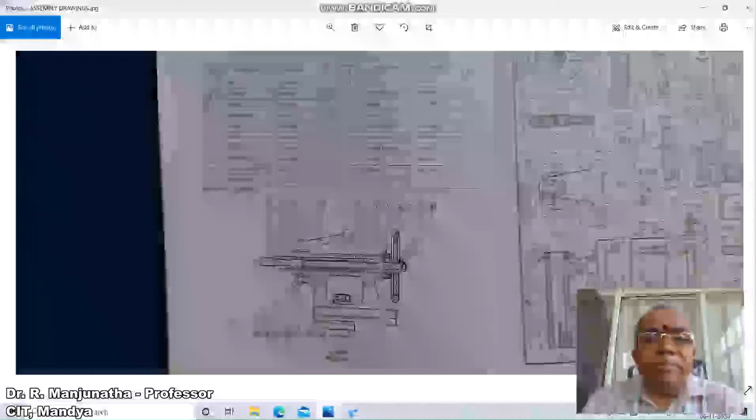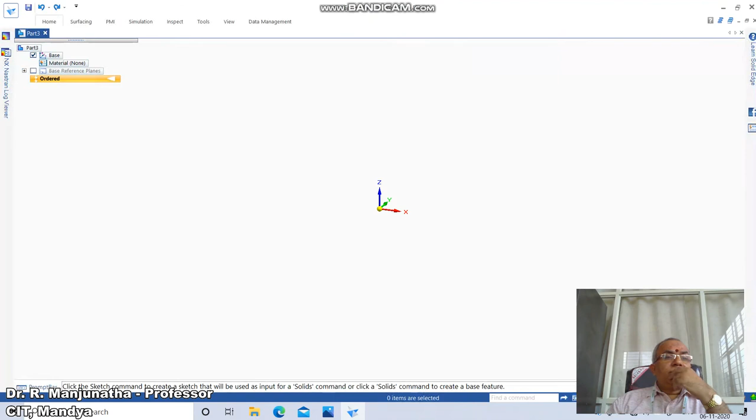So this is the section, which is right half in section, left view in full section. If you are considering this as the front top view, and this is going to be the side view, so this will be left half in section. So to do this, first we will go to new, click on isometric part, ISO part, then click on ordered, remove this icon, hide, then you just enable base reference plane.

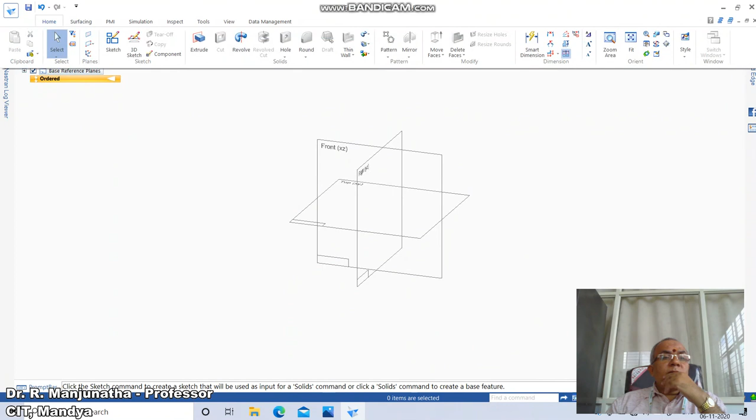So this part, if you consider this a different view, I am going to take the right side view first. So I'll just go to home, click on sketch, click on the right plane, and then we will project from sketch. Just click on OK, you select these two, then you create this cross section. So this cross section we are going to create, and then directly we can do this problem.

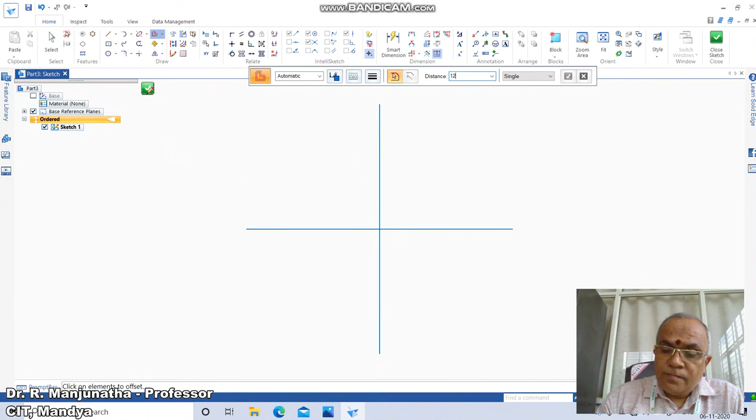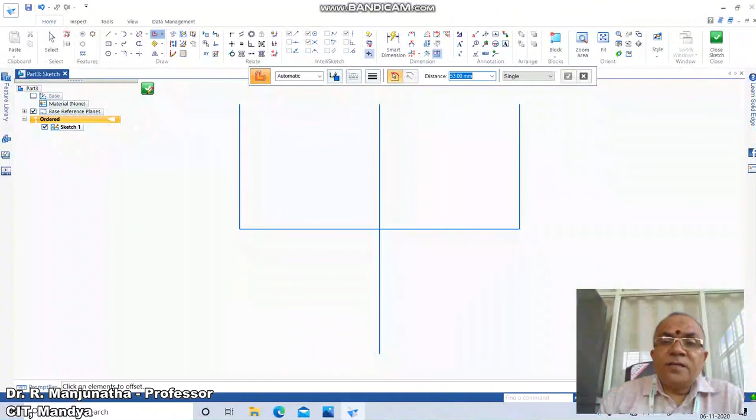So here first we are going to take 126, so we'll take offset, take 126 by 2, which will be 63. So from here to here it is 63, and from here to here it is 63. Then go to trim corner between these two and between these two. Then again we have the total distance of 106, so it will be 53. Offset, take the distance as 53, and from here to here it is 53, and from here to here it is 53.

Then again from here you take 25, means take the distance as 25. Offset, take the distance as 25. From here to here you will take this, and then go to trim corner between these two and between these two. And again you have the depth of 10 mm from here. So the depth is of 10 mm.

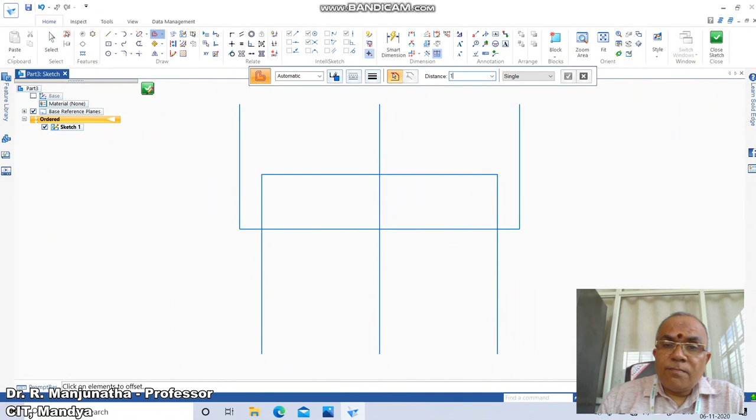So offset, take the distance as 10 mm. So from here you take this distance as 10 mm. Go to trim corner between these two and between these two. Then go to trim these two here, and then these two here, and these two here. So this is the cross section that we have got.

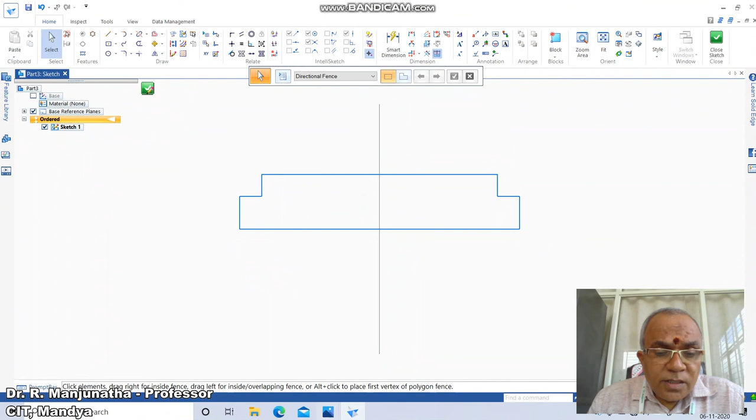So now here there is a small chamfer at this end, and there is a chamfer at this end of 1 into 45. So go to chamfer and take this angle as 45, setback distance as 1, and this as 1, which will be inside by 1 mm.

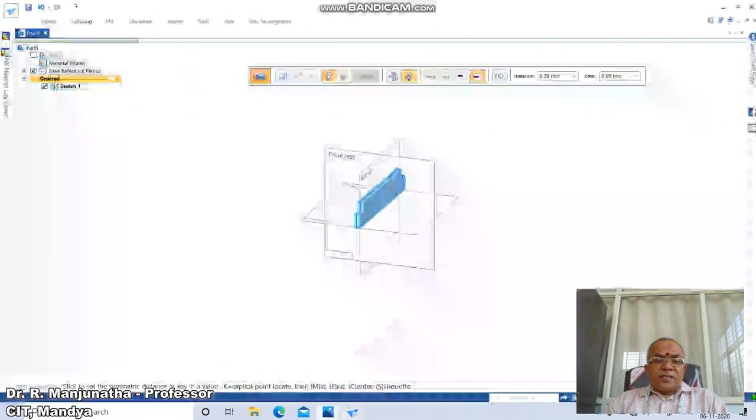Now once we complete this, you just go to close sketch, click on home, click on extrude, click on this, accept, click on symmetric extent. You take the total distance as 76, so we're going to get this, which has a square hole of 22 mm size.

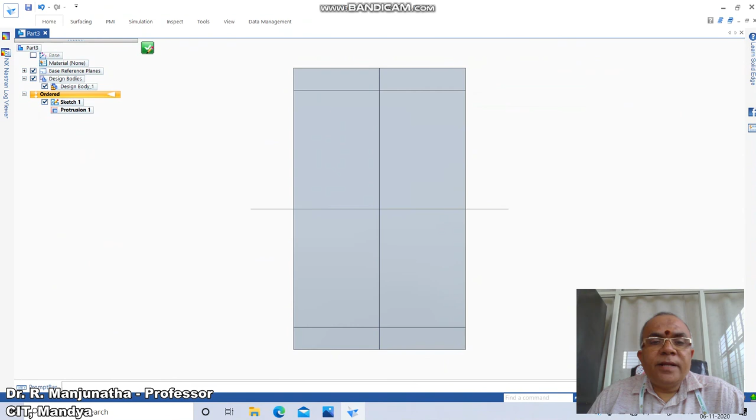So I'll go to home, click on sketch, click on coincident plane as the parent plane, then go to include or project from sketch, click on OK. You select this line and also the center line, and go to offset, take the distance as 11 mm, and from here you take 11 mm on this side and also 11 mm on this side. Similarly, the horizontal line above and below, go to trim corner between these two, between these two, between these two,

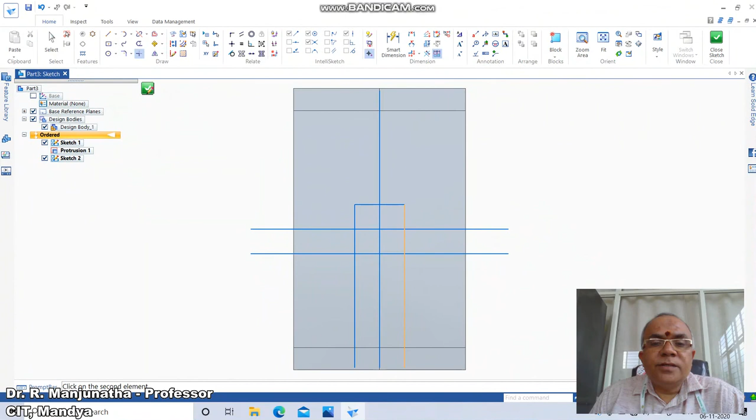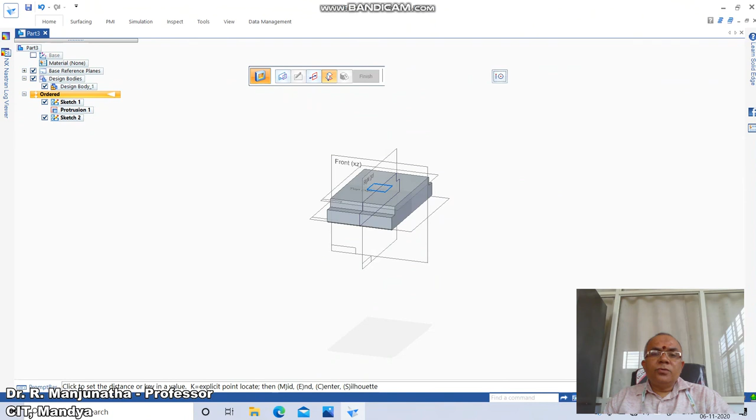and between these two. Then go to select, click on this horizontal line and delete it, and click on the vertical line and delete. Then go to close sketch, click on home, click on cut, select this, accept, and you just go to one side. You can give the exact distance, but you can take it beyond that also, and then you click the first button of the mouse. So this is how you will be able to create this model.

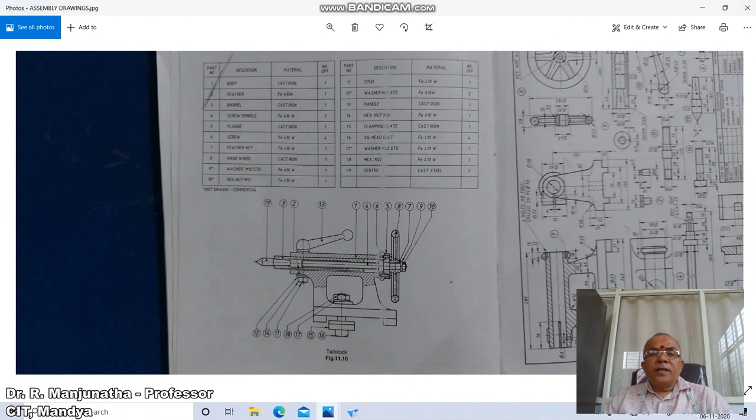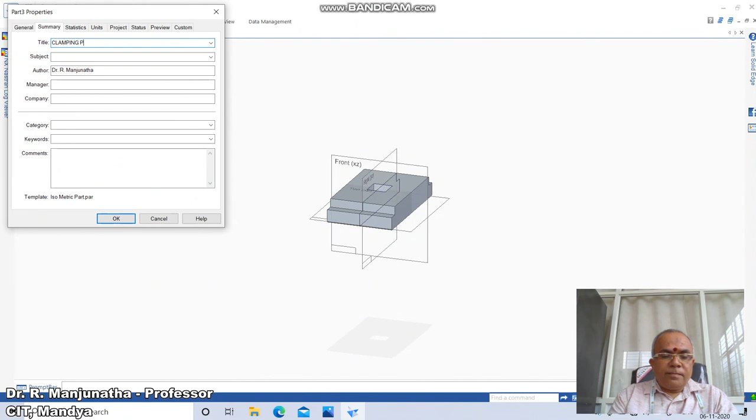Now we want to assign the material for this. For the clamping plate, it is cast iron. So go to application button, go to information, go to material table, click on cast iron and apply to model, and then go again to application button, information, file properties, click on summary and write clamping plate, and then click on OK.

Now you just click on save. File name is clamping plate, and click on save. So this is how you will be able to create this model. And now we are going to close this.